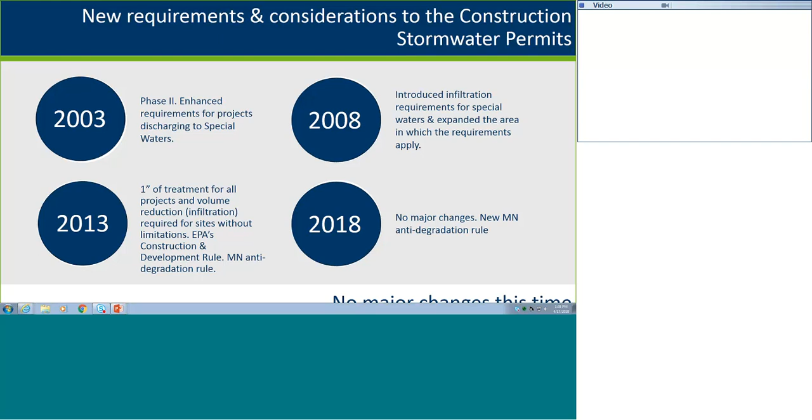In 2018, we do have a number of changes, but I don't think that any of them are major. There's nothing that's wide sweeping that's going to affect everybody or all types of projects. There are certainly changes that will affect your project on a project-to-project basis. But no major changes in 2018.

So I mentioned this document, the guide to changes for the draft permit, which is available on the website. You might want to have this out. This is the outline, as I mentioned, for the day today. I'm going to go through this whole thing. It's all the changes. I wanted to talk a little bit about this document. This document is intended to encompass all of the changes that we made. All of the changes that result in a change of policy or a change in meaning or just a changing in the expectation of what the MPCA is looking for. They should all be listed in here.

There are other things on this document that are not a change in policy, meaning, or expectation, but they are a point of interest or otherwise a part of the permit that looks so different that I thought I should include it on here. So I did mark each one of these with an asterisk as to whether I thought that it was a change in policy, meaning, or expectation, or whether or not it was not. Not every change is listed in here that was a format change, for example. I have some examples of that here coming up. But if we did make a change in the words and we are expecting something different from you, it's on this list.

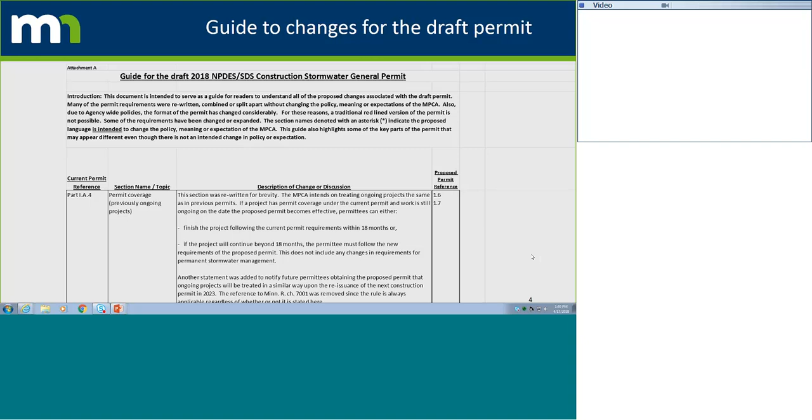I have an example here that we can go through, and I kind of just picked one here. Let's take a look at what the permit says for perimeter control. We'll look at what the permit says now and what it says in the draft permit and compare the two here. I think this is a really good example of what we did throughout this entire document. We went through this whole thing and changed and rearranged everything, as I'm sure you noticed as you went through it.

So perimeter control, which is one of our basic permit requirements, some people call it the silt fence requirement. We do require perimeter controls in certain areas, and it does not have to be a silt fence. It can be whatever you think is the most appropriate best management practice for that situation. But the permit will tell you where these things need to be. So in the current permit, Part 4C1, we talk about installing sediment control practices as necessary to minimize sediment from entering surface waters. So if you have a wetland in the middle of your project, you have to have a perimeter control around that.

That's what that's saying. In Part 4C2 of the current permit, we talk about establishing perimeter controls on all down gradient perimeters. That's the other area of your site where you are required to have some type of perimeter control. So we want to see something around the outside of the site, on the down gradient side, and around any surface waters that are on or adjacent to the project. Part 4C2 also goes on to say a clarifying statement about a floating silt curtain, and the fact that we do not recognize a floating silt curtain as being a perimeter control for the purposes of this requirement. This is the way that it's laid out in the current permit.

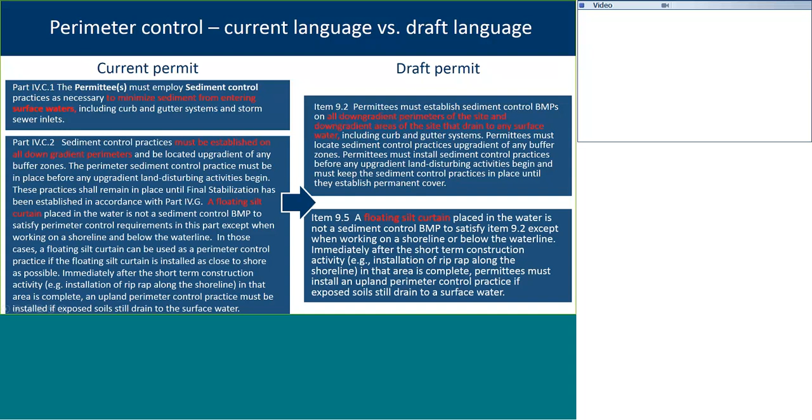So the permit has a whole new format, as I'm sure you've noticed as well. The MPCA is in the process of standardizing the format for all of our permits issued. It's all part of our new computer system here that we use for a number of things, including generation of permits. All the permits that come out of this building are going to look more or less the same, so we've all had to adjust to that.

As I mentioned, the document was also edited for grammar and for consistency with other permits. We changed the wording on a lot of these requirements from a passive tense to an active tense. Nearly every part of this permit has been rewritten in some way. It is shorter - we have about 20% fewer words total, if you do a word count on that. So we were able to get a little bit more efficient with that.

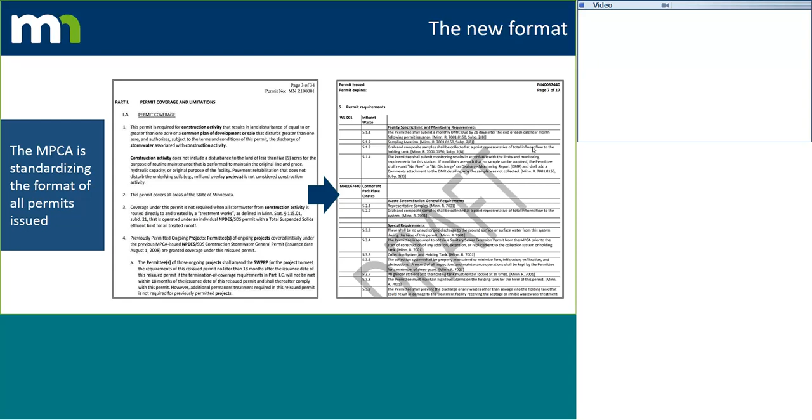Something to keep in mind - I know a lot of people have stormwater pollution prevention plan templates. I'm sure there are a lot of documents that have been generated for your city, your business, or your company where some of this formatting change may affect that. So I hope you take a minute to think about the ramifications of the new format.

One of them that I'll talk about right now is what we did for the table of contents. So let's take a look. We have our current permit on the left-hand side, and our new draft permit on the right-hand side. They look very different, but they do have a lot of similarities.

The 25 items in the new table of contents for the draft permit basically follow these part numbers in the current permit. We have the big letters A, B, C, and D all the way down, plus Appendix A and Appendix B - that's basically the makeup of the new table of contents. What we've gotten rid of are the major headings, the Roman numerals, parts 1 through 5. Those have been omitted, and there are some ramifications for omitting those.

Specifically, our state rules refer to those, and I'll discuss it a little bit more as we go through here. It is listed as one of the changes, so just hold on to that thought for a minute. Those large Roman numeral part numbers that we've talked about for years are no longer there.

The other thing we changed in the table of contents is we reduced the general provisions section into just one part, as you can see there. And the permanent stormwater management system piece, which encompassed numerous parts - all of our specific design parameters for wet sedimentation basins, infiltration basins, and filtration basins - we expanded those and gave each of them their own section. So it got a little bit shorter in one way and a little bit longer in another way, and that is the makeup of the new table of contents.

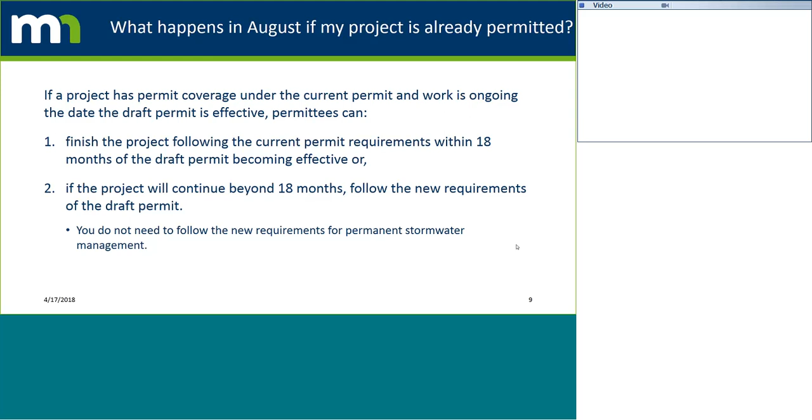Okay, let's talk about the waiting period for coverage. This is a big change.

We currently have a mandatory 7-day waiting period when you apply for the permit. We are trying to omit that. We've had a 7-day waiting period for as long as I've worked here, I guess. It seems all states have a waiting period. Some states are as much as a month. The EPA has a waiting period as well. We loved the waiting period as well in the past.

You know, we didn't used to have an online application. People applied with paper, and we had to process paper applications. We had to return applications if they were incomplete. We had to get checks cashed. There were a lot of things that had to happen here. The waiting period was very valuable. We are running at pretty much 100% of our applicants coming in online now, and a lot of those issues that we had to deal with just aren't here anymore. And we have found really no compelling reason to make people wait for 7 days, so we are trying to omit that 7-day waiting period.

So now that I've said that, you do have to understand that a few things still have to happen in order for you to have your legal NPDES coverage. You do have to successfully complete the online application. Most of the information is required, so you'll need to get through that. You'll need to get to the end, and you'll need to certify that all that information is correct, and you'll have to make the payment.

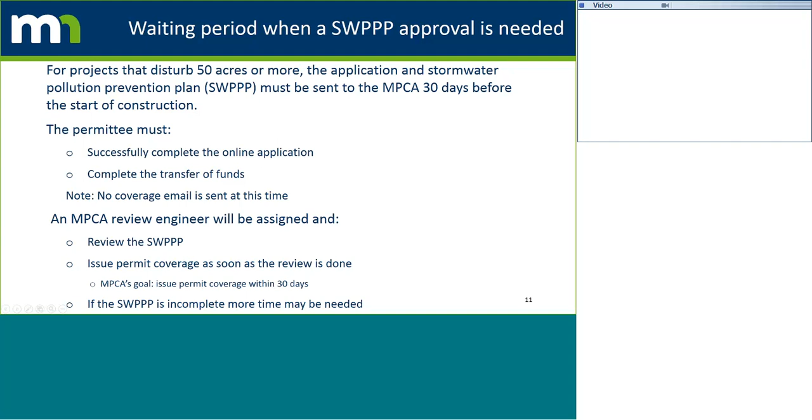All right, moving through our changes document. Let's talk about the stormwater pollution prevention plan for just a minute. This is another section that was rewritten dramatically. It's quite a list of things that we asked for in the pollution prevention plan.

A lot of the sections that contain multiple items were divided into individual items. There were some duplicate items in that list as well, so those have been removed. For the most part, the list of SWPPP elements that's required is the same. There are some additions and some modifications, and we'll go through those.

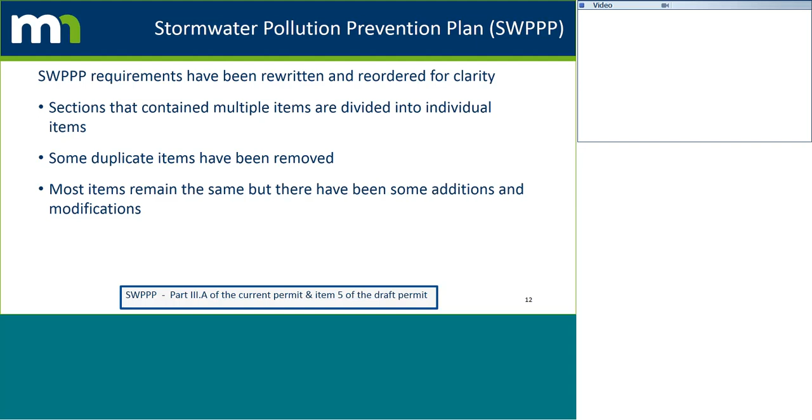This is all in item 5.1 of the draft permit. I think there's 25 items listed there. Those are all the components that need to be a part of your stormwater pollution prevention plan. So again, it's quite a list. Most of it's the same, but I will highlight those places where it is different.

One thing we're going to change is the part about the SWPPP amendments. There's a section in the current permit where we talk about SWPPP amendments and when those have to happen. And the section in the draft permit starts at 6.1 where we talk about SWPPP amendments.

The problem we're finding is our inspectors are going out to a lot of sites and they're seeing that people are not following the stormwater pollution prevention plan. The contractors are sometimes not installing the BMPs that are shown in the SWPPP, and they're using less effective BMPs, and frankly, a lot of them that are just not appropriate for the site conditions.

So, I'll make up an example here. If you're doing work on a bridge abutment with a 45-degree slope down to water, a stream, let's call it, and the SWPPP's calling for an erosion control blanket to be installed, we don't want to see just mulch in that area. We don't want the contractors to make that substitution there, because that's not an effective BMP on a 45-degree slope with a stream at the bottom.

So here's what we're going to do, here's what we're proposing. Both the current and draft permits allow for SWPPP amendments. You can change your BMPs whenever you want. We're going to keep that concept the same.

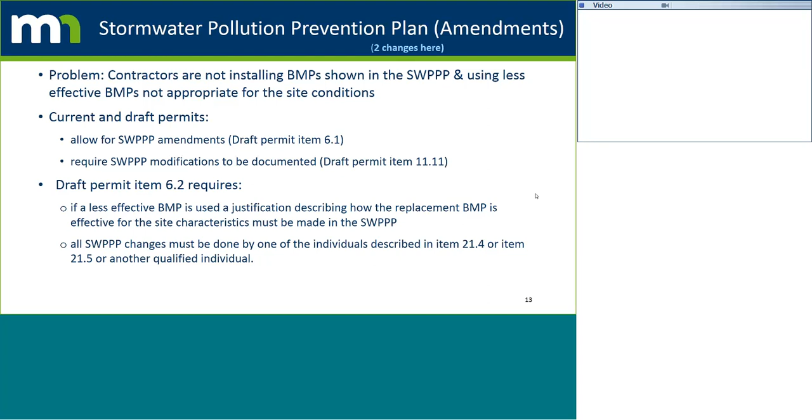So that is the draft permit and how we want to handle amendments.

Another piece of documentation. I know that the pollution prevention plan requires a lot of documentation. It wasn't our goal to load that up with a bunch of new stuff, but we're seeing some of these problems where some of these projects are falling down. We're going to ask for some documentation to try and help that. And here's one of them.

Where systems cannot meet the full volume reduction requirement on the site, for example, the site may have infiltration prohibitions, the permittee must document the reasons in the pollution prevention plan. So we have a base requirement in item 5 where we say that we want to see 1 inch of volume reduction from all the new impervious surfaces. That's our core requirement for the stormwater management piece. If you're not able to provide that, we would like to see some documentation in the pollution prevention plan.

For most sites, that's going to be that your site has one of the infiltration prohibitions on it. So if you have a site and you've only got 2 feet of clearance between the ground and the groundwater, that is one of the infiltration prohibitions. We don't want to see infiltration on that site. All you need to do is explain that to us in the pollution prevention plan.

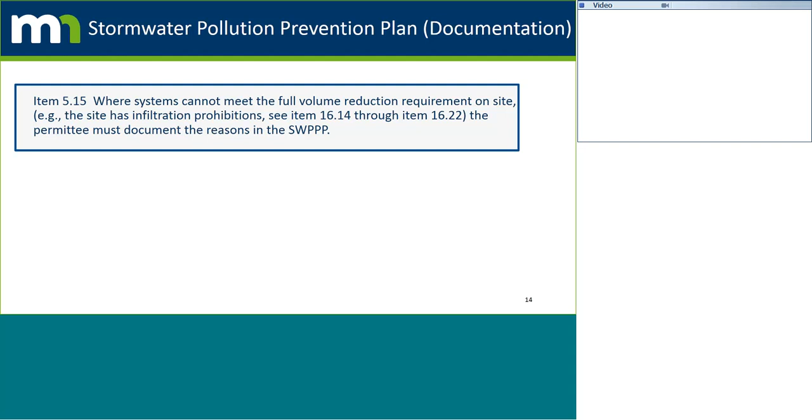We have collected quite a few of these plans where we have people doing stormwater ponds, wet sedimentation basins, which are not a volume reduction practice, and there doesn't seem to be any indication that volume reduction was even considered. So that's where this request is coming from. We want to see some documentation.

Another piece in regards to our buffer zones: permittees who determine that compliance with the following requirements is infeasible must document that determination in the pollution prevention plan.

Where we're asking for that is for temporary sediment basins. That's already a requirement in our current permit. For linear projects, if the permanent stormwater treatment system cannot be constructed within the right-of-way, a reasonable attempt must be made to obtain additional right-of-way. We want to see documentation of that. That's in the current permit and the draft permit as well.

What we've added is that if buffer zones, as described in item 9.17 and item 23.22, cannot be maintained, that you provide a justification for that as well in the pollution prevention plan.

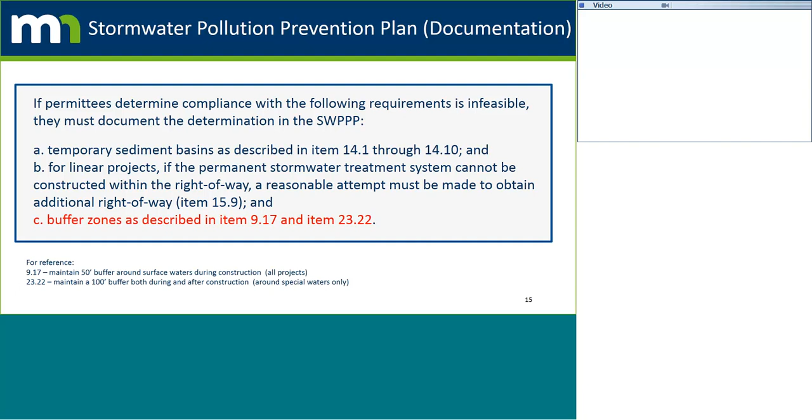Our inspectors are reporting back that a lot of the buffer zones that they're seeing out there have been cleared, and there doesn't seem to be any apparent reason why. So we don't want to see that. If you're going to be in there and you cannot maintain that 50-foot buffer zone during construction, which is required in 9.17, or if you're not able to maintain the 100-foot buffer around the special and impaired waters, which is item 23.22, we just want to see a justification of that in the pollution prevention plan.

All right, moving on to karst areas. We just deleted this part. This section, as you see on your screen here, appears in the current permit. We deleted it. The current permit already prohibits infiltration in karst areas.

We have added a requirement. The draft permit now requires a liner for wet sedimentation basins if they are in karst areas. We were not really able to come up with a whole lot of other reasons why karst would be a factor on a construction project outside of these two spots. So we deleted this general paragraph, and we now deal with it in the wet sedimentation basin piece and the infiltration piece.

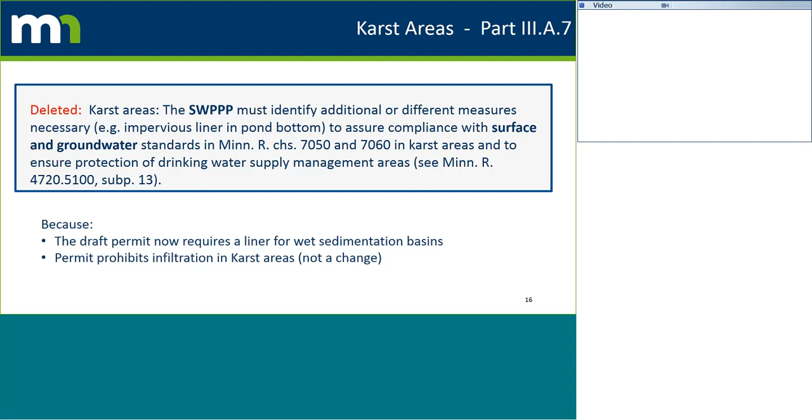And that's as much as I'm going to say about karst.

The permanent stormwater treatment part of this permit has changed too. One of the big things we are adjusting here is how this permit interacts with the MS4 ordinances. The current permit provisions allow developers and consultants to follow the local stormwater treatment requirements instead of following the construction stormwater permit requirements in Part 3D, which is in the second paragraph. This is described in Part 3D, second paragraph of the current permit.

So we added this paragraph last time. It was in response to people saying that there are too many stormwater regulations in the state of Minnesota. We have city ordinances, we have watershed district requirements, and we have this state permit. They all require permanent stormwater management if you're going to do new construction. And the idea was that these things often read the same, so why do we have to have three overlapping jurisdictions, if you will, with these requirements?

So we added a piece to our permit that said if you are in a regulated MS4 community, and that MS4 community has updated their ordinance, as they were supposed to be doing according to their MS4 permit, developers and engineers could just follow the local ordinance and they didn't have to follow the state requirements here in this part of the permit. So that was the idea.

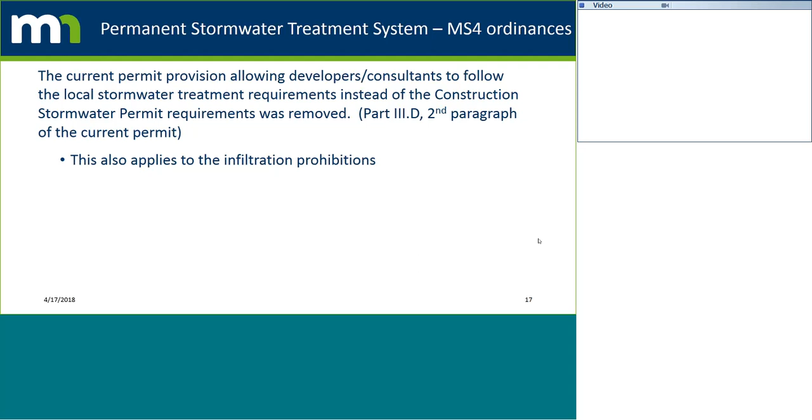Moving on. We're still in the section for permanent stormwater treatment systems. I guess I wanted to talk just a minute about the section in general. This is Part 3D of the current permit, and it's item 15 in the draft permit. We kind of go over the main goals of the permanent stormwater treatment system in this item 15.

And we reworked this piece quite a bit. It's very different looking. We tried to make it more clear. And I invite everyone to really read this item 15, go through it. I think there are 9 parts to it. And it should be clear what the goals are.

This is not where you'll find the design requirements for our systems. These are the overall goals. So we tried to very clearly define when the permit requires a stormwater treatment system, which is if your project's going to increase impervious surfaces by 1 acre or more, you're required to have a permanent stormwater treatment system.

So this section 15 goes on to explain the level of treatment, which basically is we want to see 1 inch volume reduction from those acreage of impervious surfaces. And then we try to step through what that means. How are you going to achieve this? What methods must be considered first? We want to see volume reduction considered first. And if those methods are not viable, what to consider next.

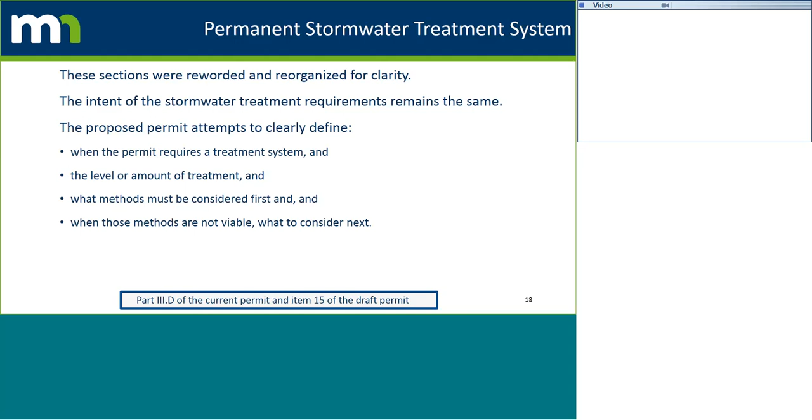So please read that item 15. It's supposed to be a clear step-through process to clearly define what it is that we expect for the permanent stormwater treatment system. And this is prior to getting into the design requirements, which we'll talk about here. So that's part 15, item 15 in the draft permit.

Infiltration prohibitions. The proposed permit prohibits infiltration systems constructed as part of the project, regardless of whether or not the construction stormwater permit requires stormwater management, if the site receives runoff from vehicle fueling and maintenance areas.

So maybe I can back up just a minute there. We have a number of prohibitions in the permit where we don't want to see stormwater infiltration. The way it's set up right now is that none of those apply to your site unless you're required to do infiltration or stormwater management.

So this is new, this idea that you're looking at right here. This is saying that for any site that's a vehicle fueling and maintenance area, we don't want to see infiltration there, and that's regardless of how much impervious surface you've added or subtracted. We don't want you to construct a new infiltration system as part of that project for vehicle fueling and maintenance areas.

This will be the only prohibition that would apply to all of those sites. The rest of the stormwater or infiltration prohibitions would only apply if your project is required to build an infiltration system.

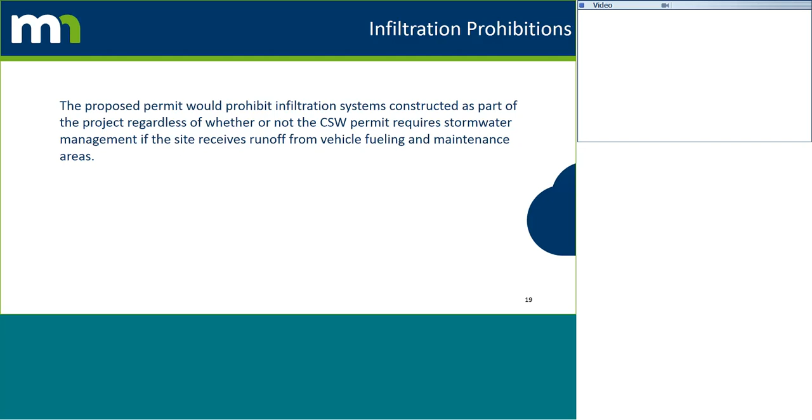All right, let's talk about soil information for infiltration design.

Out of our current permit that we have today, we state the permittees must employ appropriate on-site testing consistent with the Minnesota Stormwater Manual to verify soil types. That's really all it said, and it referred you to the manual. The manual has tons of information on soil exploration, including how to do it, where to do it, how many times to do it.

We're expecting people to follow the stormwater manual. That was the intent. The permit requirements were pretty general, if you will. And I've got to say, we've been a little bit disappointed about the quality of information that engineers are bringing to these stormwater pollution prevention plans.

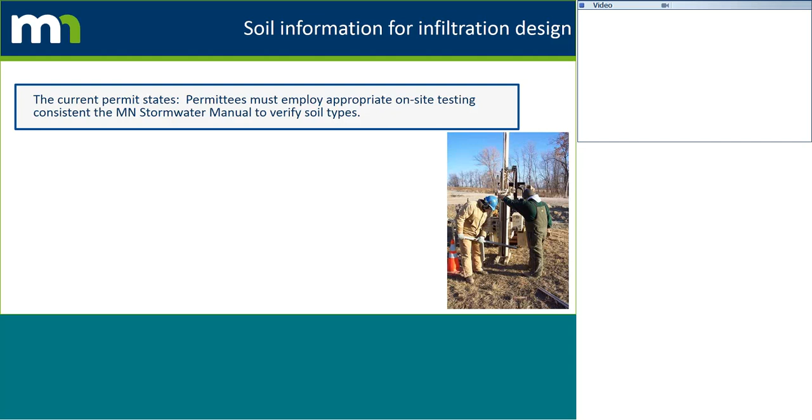Yeah, we have had people trying to use county soil information, county soil maps. We've had people try to rely on soil borings that were done nearby. A lot of times there was a highway nearby and they collected the old soil borings for those areas and attempted to do design work on those.

There were times when we really couldn't find any soil information at all. In their pollution prevention plan, we'd see a nice looking rain garden, with a depth to it and everything, but no soil information.

So we have modified this piece of the permit quite a bit here. Item 16.10 in the draft permit says permittees must provide at least one soil boring, test pit, or infiltrometer test in the location of the infiltration practice for determining infiltration rates.

So at least one. Go out there and do some on-site testing to see exactly what's there. It doesn't have to be an infiltrometer test, although that's probably the best thing to do, but at least a soil boring, or dig down and look in there. Do something in that area to find what is exactly in that area.

And the permit now requires at least one. If you have a large infiltration area, the manual is going to recommend you do much more than one soil boring, test pit, or infiltrometer test, which of course you should do, but the permit is going to require at least one.

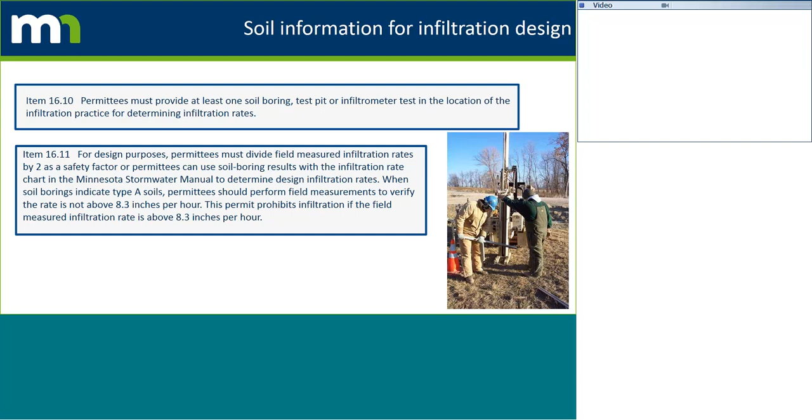Just keep in mind that there is a requirement outside of this that says infiltration is prohibited if the field measured rates are above 8.3 inches per hour. So this is a bit of a change here. We're not just going to rely on the manual. We have brought some of that stuff forward as permit requirements.

Here's another big change: infiltration prohibitions when you are around or on top of contaminated soils or groundwater. The current permit prohibits infiltration if high levels of soil or groundwater contaminants will be mobilized by the infiltrating stormwater. That's what it says today. We had numerous questions over the past 4 years about what this means and what am I supposed to do. What are high levels? What is the definition of high levels?

So if you go to our stormwater manual, we do talk about high levels. We do talk about specific pollutant parameters, and they're listed in there with numbers associated with them. If you were to look at those lists of pollutants and numbers that constitute high levels, it would lead one to think that you are supposed to be doing testing.

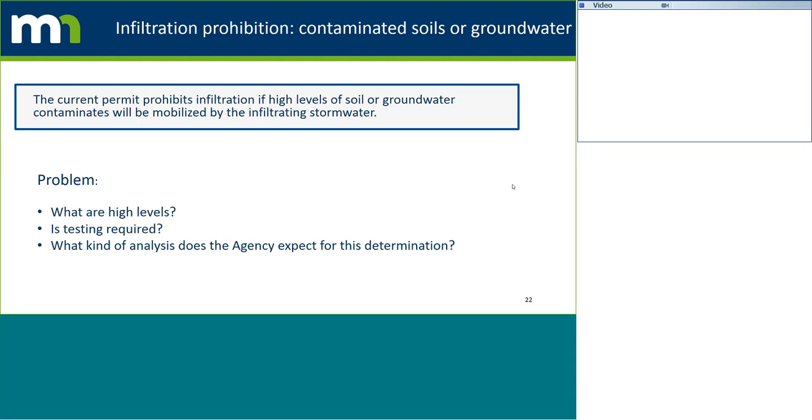So is testing required was a common question. How else are you going to know if you are in violation of this permit requirement? And I think ultimately what people really want to know is what kind of analysis does the agency expect for this determination? These are all good questions.

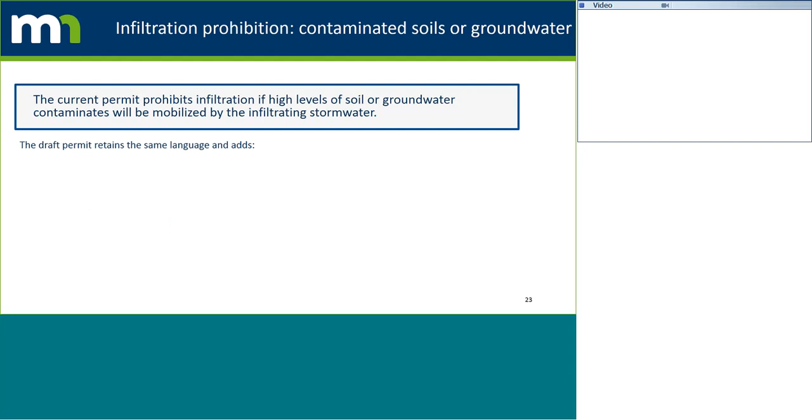So, the draft permit retains the same language here that we have in this box that you'll find in the current permit, and we have added to that. We have added this statement: Permittees must either complete the MPCA site screening assessment checklist or conduct their own assessment to determine the suitability for infiltration. The assessment must be retained with the Stormwater Pollution Prevention Plan. For more information and to access the screening assessment tool, see the Minnesota Stormwater Manual.

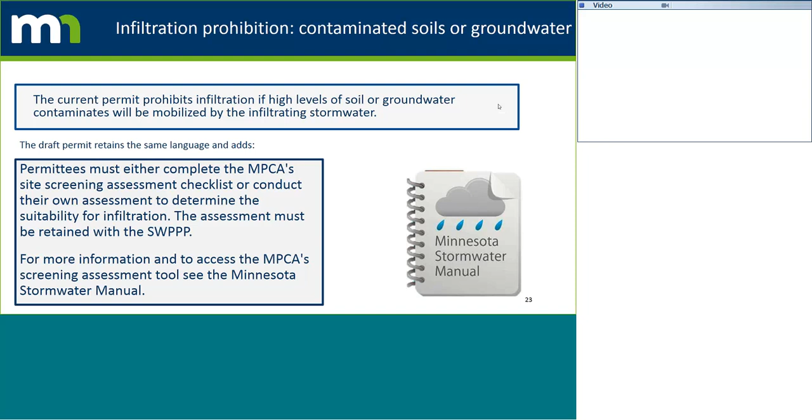Thanks for those questions, and keep those coming in. Back to these contaminated soils or groundwater issues. In addition to that checklist that we are requiring, we are encouraging people to use the What's in My Neighborhood tool that we have on the MPCA website. We have information, very specific information in some cases, on a lot of properties around the state, especially around the metro. You may find the answer to a lot of your questions right here using this tool, the What's in My Neighborhood website. Check that out.

The range of information is a wide range of information here. We have very detailed information on pollutants around the metro. We know which way they're heading in some cases. There's a lot of information here that can assist you in determining whether or not infiltration is appropriate for your site.

And what I'll close with here on this topic: if you've gone through the checklist and the site appears to not be sending up any red flags off of the checklist, you're welcome to proceed with infiltration. If there are things on the checklist that are raising red flags, or if your property shows up on this What's in My Neighborhood website, we are not asking you to do any further exploration beyond that. You still don't have to go out and do testing. We're telling you that infiltration is not appropriate for your site and that you should try a different method. So that really can be the end of your exploration on this issue.

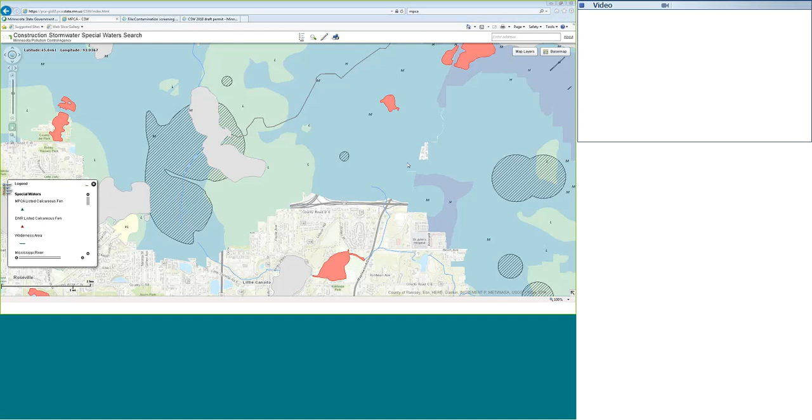Bear with me 1 second here.

All right, a quick one on filtration systems.

Do you want me to pause for a minute?

Okay. A quick one on filtration systems here. We do have one question on this last topic. What about drinking water supply management areas where there's no MS4 permit scheme?

Oh, there's a good question.

Yeah, we have drinking water supply management areas that are not within the boundaries of a regulated MS4 community. Our permit is going to prohibit infiltration in those areas. And the primary reason is we have a relationship, if you will, with our MS4 community.

They hold a permit with us. We know who they are. We're comfortable with letting them make this determination. Hopefully they'll consult with us on that.

And we're just not comfortable with these drinking water supply management areas that are all over the state. And we just don't know who these people are or their level of expertise on this subject. Thank you.

We also have another question. Please discuss seasonally saturated soil versus groundwater. My understanding is if mottled soil, like for septic system design, is found within 3 feet of the surface, this is considered an infeasible area for infiltration.

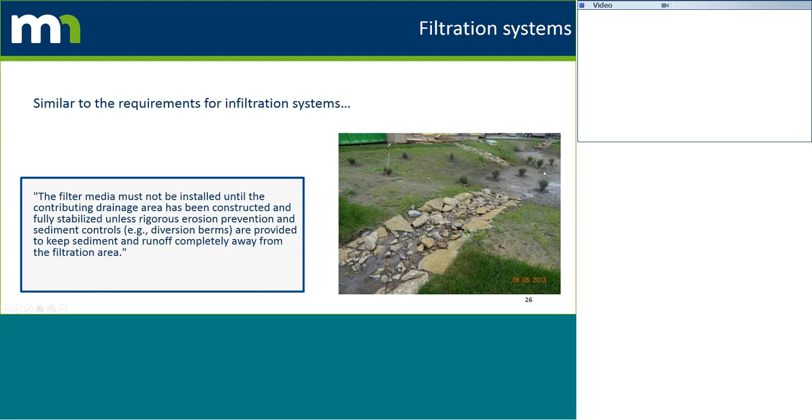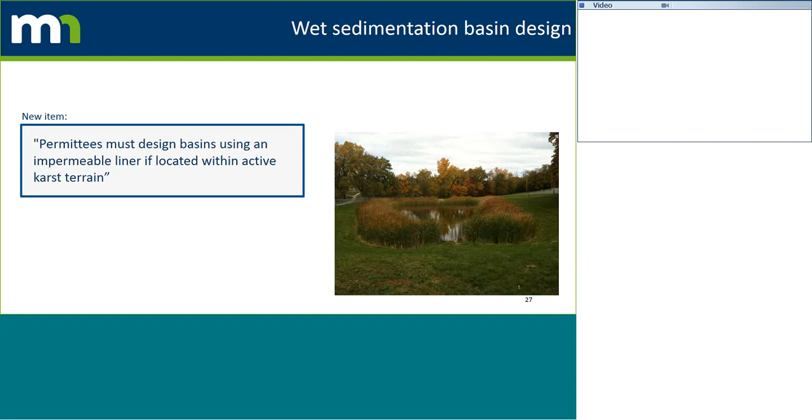Wet sedimentation basins - I think this is item 18 in our permit. We have our long list of design parameters, and we made one adjustment: permittees must now design these basins using an impermeable liner if located within active karst terrain. I mentioned this earlier - the stormwater manual has always recommended a liner in those areas, and we've always told people to install liners there. It's never really been in the permit, and now it is.

Conveyance channels. How are we doing for time? Fifty-five minutes, okay great. Conveyance channels.

Part 4B3 of the current permit contains this requirement. I'm not going to read the whole thing, but it talks about conveyance channels and routing stormwater around sites. This piece was added because of the EPA C&D rule - I believe we took it word for word. We already have a lot of requirements in the permit for ditches and what we expect people to do around them, so this conveyance channel piece was in addition, added because of the C&D rule.

Quite honestly, I'm not exactly sure how this requirement came into play on a lot of construction sites. I get what they're saying, but I don't know that it's always possible to route stormwater around the site. It didn't seem appropriate on all sites, and we already had a number of requirements in the permit for what to do with swales. So I got the idea to summarize all of those ideas, and you can find that in the Guide to Changes document.

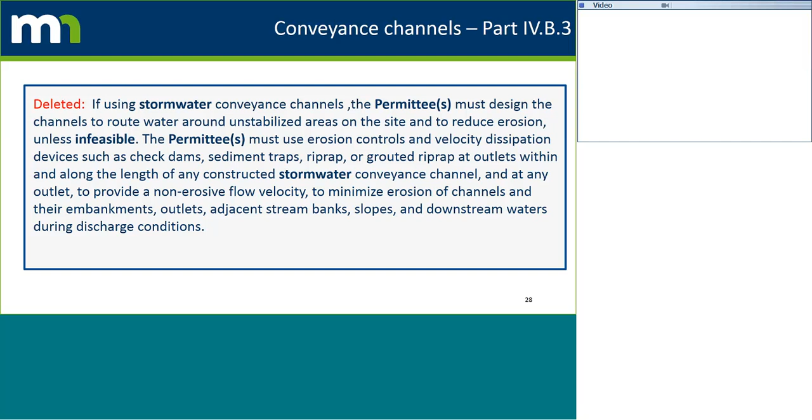This paragraph has been deleted. We feel that we've got these channels protected and covered through our other permit requirements.

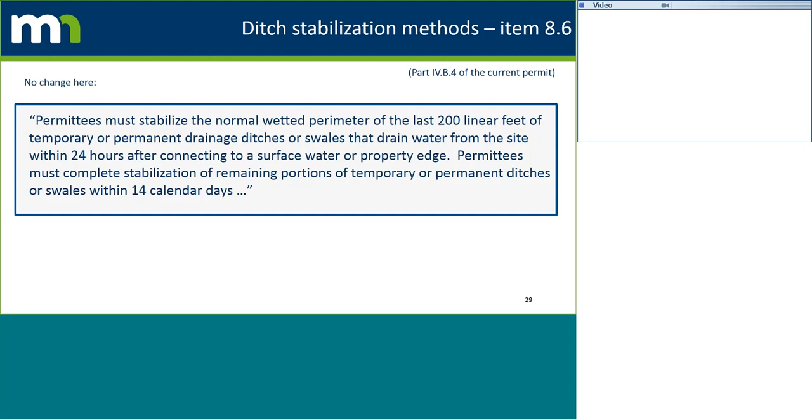Let's talk about ditch stabilization. We've changed this piece a little bit as well. Maybe I'll set this up with this permit requirement, which leads into the next piece - this has not changed, you can find it in the current and draft permit. Permittees must stabilize the normal wetted perimeter of the last 200 lineal feet of any temporary or permanent drainage ditch or swale that drains water from the site within 24 hours after connecting to a surface water or property edge. Permittees must complete the stabilization of the remaining portion of these ditches within 14 calendar days. So we kept that piece.

The current permit makes a clarification, stating that permittees must not use mulch, hydromulch, tackifier, or similar erosion prevention practices within any portion of the normal wetted perimeter of a temporary or permanent drainage ditch or swale. That's what we've been running with for quite a few permit cycles now. And we've added this piece regarding a continuous slope of greater than 2%.

So while we were very prescriptive as to not use mulch anywhere in a ditch, we are changing our position on this. If you want to try mulch or hydromulch on some of these flatter ditches, the permit's going to say that that's okay. We heard from a lot of people on this permit requirement, a lot of people at Department of Transportation, and a lot of people that do county road projects and that type of construction. We do have a lot of flat parts in the state of Minnesota. We have ditches that are at 1%, we have ditches that are at 0%. If you have a project like that and you want to try mulching those areas, the permit's going to now say that that's all right.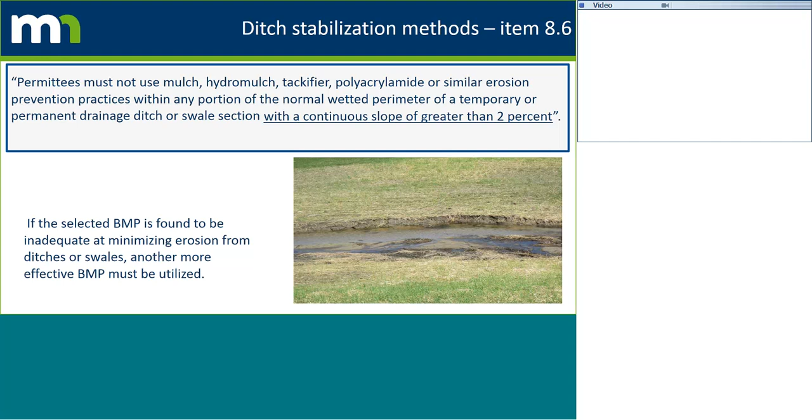Anything with a continuous slope of greater than 2%, we are going to be looking for the more robust erosion control practices like blanket, and not mulch. As with all the BMPs in our permit, if the selected BMP is found to be inadequate at minimizing erosion from ditches or swales, another more effective BMP must be utilized. So you may still end up having to blanket some of these ditches, but the permit is allowing you a different starting spot. If you want to use mulch and try it and see if you can get vegetation going, the permit will say that's okay. If it's getting blown out and washed away every time it rains, just like every other BMP in the permit, we would ask you to do something that is a step above, a level higher.

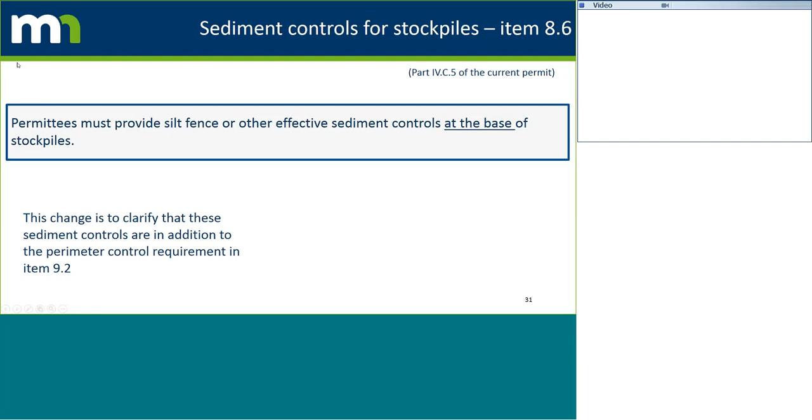A word about stockpiles. This isn't necessarily new, in my opinion, it's more of a clarification. But I think that there's been some misunderstanding about this requirement. We say that permittees must provide silt fence or other effective sediment controls at the base of stockpiles. I'm sorry, that's the piece we added - we added the words 'at the base.' We've always required sediment controls around stockpiles; we're now going to say that it has to be at the base. And just to clarify, this is to help clarify that this whole requirement is separate from the perimeter control requirements that we discussed earlier in 9.2. So hopefully that makes it more clear.

There seems to be a little bit of a misunderstanding amongst permittees. A lot of people felt that if they had perimeter control around the entire site, that they were automatically in compliance with the stockpile requirements, no matter where the stockpile was inside of the site. That is not true. This is a separate piece, so we're trying to clarify that here.

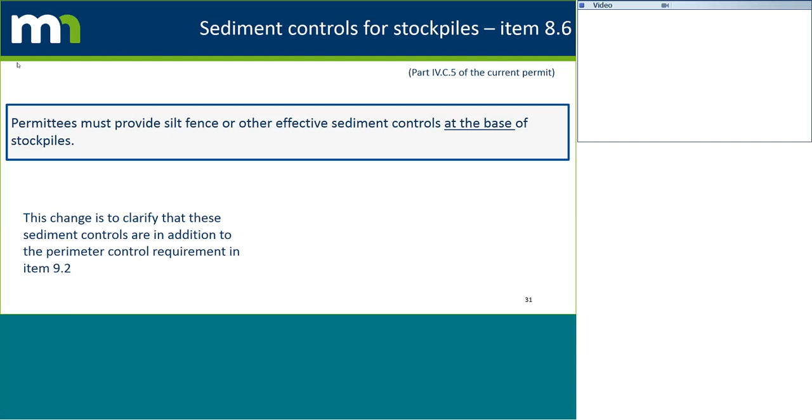We do have a question coming in on your last slide regarding stockpiles and perimeter control. Regarding stockpile perimeter control, what acceptable distance from the base of the pile does the sediment control have to be located in? Oh, that's a good question. The separation distance is not currently defined in the draft permit. 5 feet would be a nice recommendation, but we did not put that in the draft permit. Perhaps that's a good suggestion - please put that into a comment. Right, it has to be effective, that's the requirement. You can increase the effectiveness by adding some space in there.

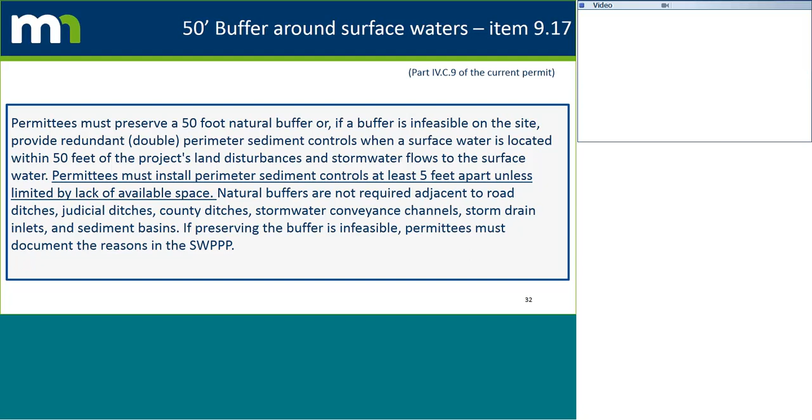We have recommendations on a lot of this stuff in the manual. Again, not all of this stuff becomes permit requirements. But yes, the draft permit does not specify.

And then one more question on the buffer you just talked about. Can you be in the buffer area if redundant sediment controls are in place? I guess the answer to that is yes.

You're supposed to be avoiding those areas. The 50-foot buffer is a sediment control requirement. Of course, the permit recognizes that you're going to have to be in there for certain reasons, and if you are in there, that's when the redundant controls are needed. And of course, you must document that as the new piece that we added.

I'll talk a little bit more about buffer zones. We have the 100-foot buffer zone that appears in our permit for special waters. I want to spend a little more time on buffers, so we'll come back to that towards the end of this.

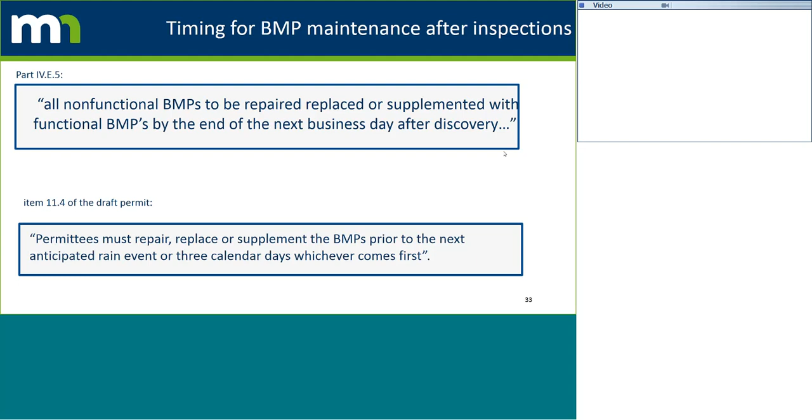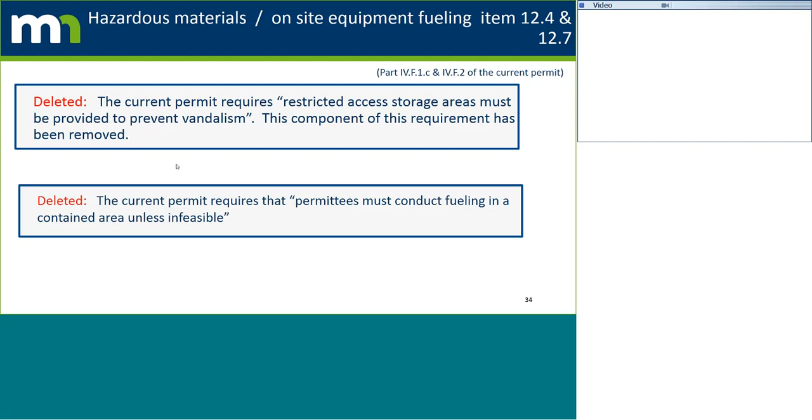We deleted these. Some of the stuff in the pollution prevention section, I start to wonder whether or not it's really a stormwater requirement. Vandalism is one thing - if you've got vandalism on your site, you probably have problems you're going to need to react to. Same with vehicle fueling areas. If you spilled on your site, you're still responsible for that. You're still responsible for vandalism, and for things that have been spilled, regardless of any permit period. They just didn't seem appropriate, so we removed those. That's as much as I'll say on that.

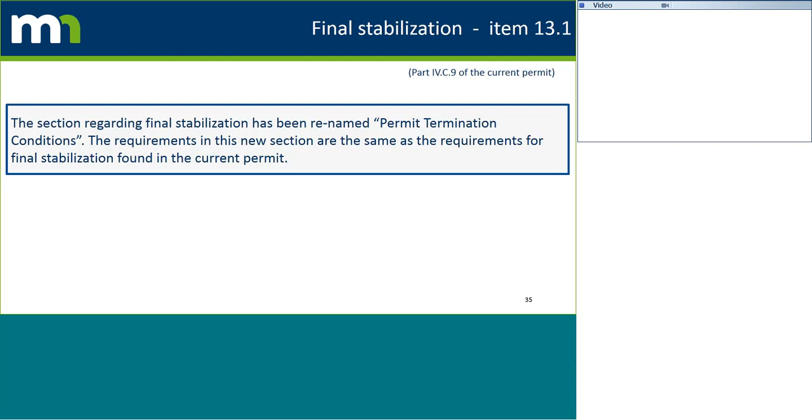Final stabilization was the title of one of our permit sections in the current permit, Part 4C9, to be specific. It is item 13.1 in the draft permit. We just renamed this piece - instead of calling it final stabilization, we're now calling it permit termination conditions. That's really what it is. If you read it, there are 5 things on that list, and they are the things you need to do before you can terminate the permit. One of those things was that you have permanent cover on your entire site. All too often I have heard people use the term final stabilization when they really meant permanent cover, and it seems to be causing some confusion. It seemed like an easy way to solve this by just retitling the section Permit Termination Conditions. So take a look at that. The actual list below is the same - we made no changes there. It's just a change in title.

So let's talk about discharges to prohibited waters. One of the things we have to deal with in this new permit are the new Minnesota rules addressing anti-degradation. This is one thing that has changed since the last permit, and one thing we were required to write something different about. We have this classification now called prohibited waters, and it's a higher tier that requires more protection. This is all part of the anti-deg rule that passed in Minnesota a couple years ago. Federal rules require all NPDES permits to meet these state rules for anti-degradation as well. We had to put something in for projects that discharge to prohibited waters. So we have that now.

The prohibited waters is a smaller subset of our special waters that we've always had. In fact, the actual bodies of water we're talking about here haven't changed. What is proposed as a prohibited water is still protected as a special water under the current permit - it's just now in a different classification. So if you look at our whole list of special waters in the back, which is long, with all the different types - wilderness areas, the Mississippi River - they're all listed back there. That list is the same; we haven't changed the actual waters at all. But we are changing the requirements for a subset of those waters, which is called the prohibited waters.

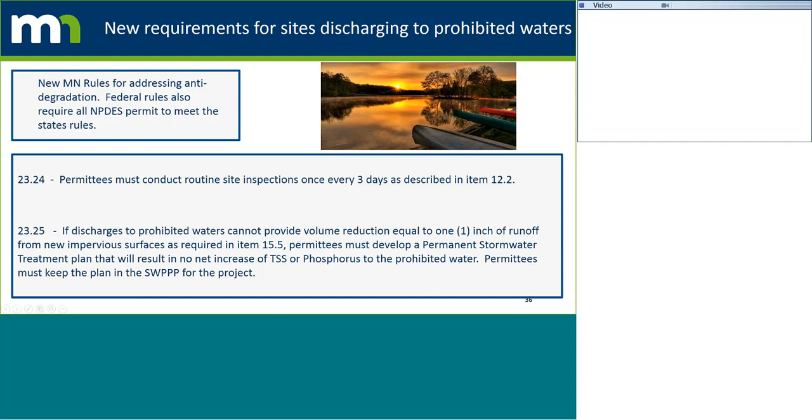Using vegetation, grass swales, ponding, combinations of these things - perhaps iron-enhanced sand filters would be an option for some of these areas. Potentially tricky, but not potentially a lot of projects here. And as with all projects, if you want assistance with this stuff, please call us, and we will help you get through this.

Temperature controls for trout streams. This piece has changed a bit. Let's read the base requirement here. This part has not changed.

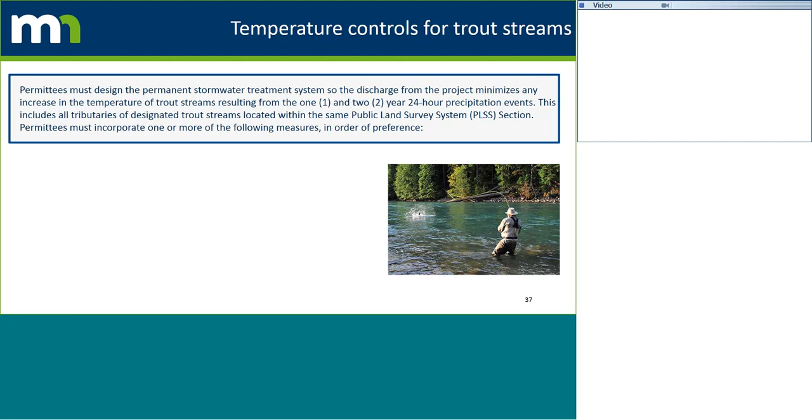We are saying, and will continue to say, the permittees must design a permanent stormwater treatment system so that the discharge from the project minimizes the increase in the temperature of trout streams resulting from the 1 and 2 year 24-hour storm event. This includes tributaries. And we say that permittees must incorporate one or more of the following measures in order of preference.

So the current permit has a list, A, B, C, D, E, of these things that we want you to try. We have modified that list. The draft permit has reorganized these a bit. In the current permit, number 1 was to minimize the new impervious surfaces.

Well, that might be one of the best things you can do for temperature. That's something you should be looking at during the planning phase of your project. But if you are still creating new impervious surfaces, you need a BMP to mitigate for that, and simply minimizing it doesn't mitigate the impervious surfaces that you have created. It didn't make a whole lot of sense. We took that out of this list.

And the other ones are listed there. We're talking about connected impervious surfaces. Letter C talks about doing stormwater infiltration. D talks about ponding, and E ends with other methods. So the new list is different from that.

We are now saying that if you can provide infiltration as described in item 15, that is all we're going to ask for temperature mitigation if you are discharging to a trout stream. This is similar to what I just described - if you can provide 1 inch of volume reduction per the base requirement you'll find back in item 15, that really is the best thing you can do for temperature control in trout streams. So we moved that to number 1.

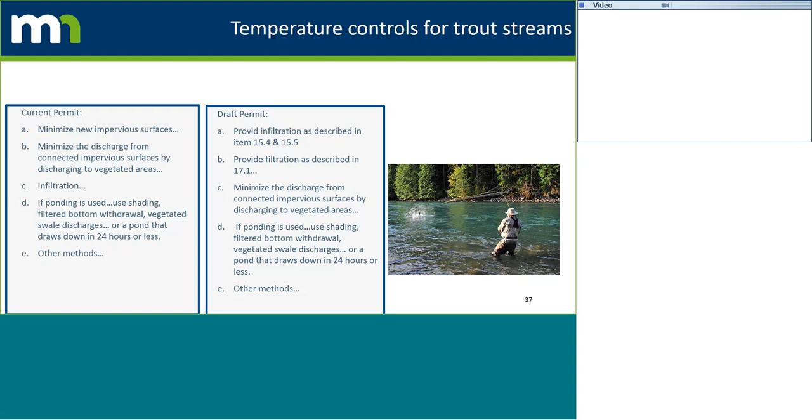I want to come back to ponding around trout streams too. We had questions on that earlier, but this is the temperature control for trout streams as you see it in the draft permit. We have just reorganized that list, if you will, that we have in the current permit.

All right, let's talk about who should be listed as a permittee. As you know, this program is a co-permittee program. We have an owner and an operator that sign on to this. They are the people who are legally responsible for everything that's in the permit. We intend to more clearly define who the owner and operator is.

We have added a new definition for general contractor. Let's take a look at that. General contractor means the party who signs the construction contract with the owner to construct the entire project described in the final plans and specifications. Where the construction project involves more than one contractor, the general contractor is the party responsible for managing the entire project on behalf of the owner.

That's a new definition that we added. It is word for word the definition of general contractor that we had in our permit, I think three permit cycles ago. And we have not had a definition for general contractor since then. So we're bringing that back. It ties into the definition we have for operator, and we added that underlined part there.

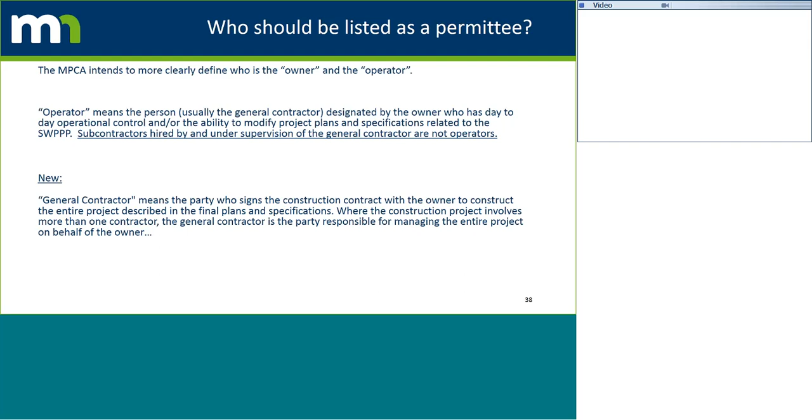I do want the permit language to be clear, though, so we will take a look at how that is presented in there.

The last item on our list, if you're looking at the guide to permit changes, is what I call rule references to this permit. This item was added to the proposed permit to preserve continuity with state rules, such as Minn. R. 7090, or other documents which refer to specific parts of the construction permit by name that will no longer be used.

Going back to the beginning of the presentation, I told you that in the table of contents, we're taking out Roman numerals 1, 2, 3, 4, and 5. Some of those Roman numerals are these parts right here. Roman numeral 3 is titled Stormwater Discharge Design Requirements. Reference to that part of the permit is in our Rule 7090 and some other rules, and that's gone now. We don't have that section titled anymore. Part 4 of the current permit is titled Construction Activity Requirements, which is slated to be deleted. We're not going to have a section titled that anymore. The pieces within that are still there, but that title is gone. Appendix A is also gone - that's all covered in item 23.

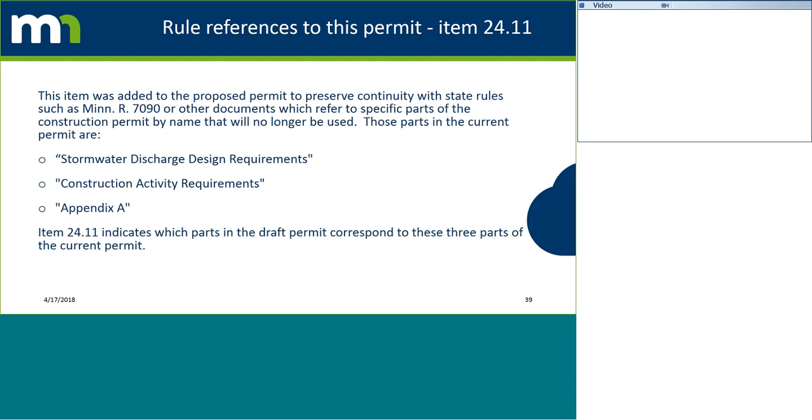Going back to what I said when we modified that table of contents, there were ramifications for removing some of those items, and I want you to think about those, and then look at this piece, item 24.11, and see if that fixes the problem for you. If not, please comment, and maybe we can do something else to preserve that continuity. But we did cause a little trouble by taking those titles out of the table of contents.

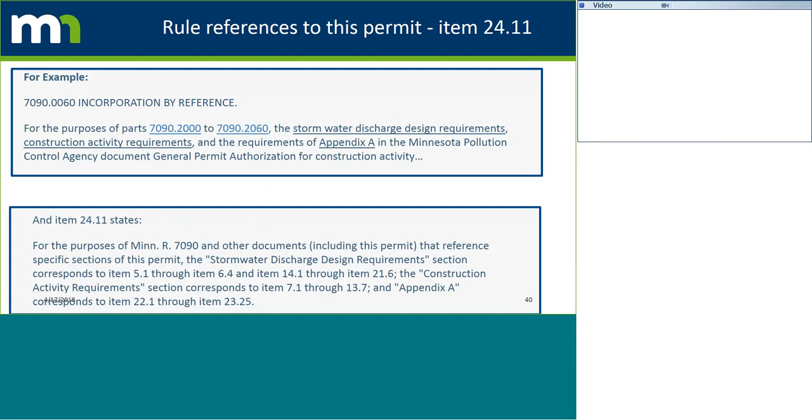So here's my example. We have Rule 7090, and this is what it says word for word right out of the register: 'For the purposes of these parts, the stormwater discharge design requirements, construction activity requirements, and Appendix A.' Well, those things aren't going to mean anything in the draft permit, because those words are gone. Oh, here's the piece I was looking for - this is the actual item 24.11. So think about your own fact sheets, your own ordinances, or any other times that you've referenced our construction permit, and see if this piece is helpful for you.

That brings us to the end of the changes to the permit document. I'll keep rolling here because we've had questions come in, and we had questions come in ahead of time too. I did say that I would talk about buffer zones a little bit more - I want to get back to that as well.

First of all, let's just talk about buffer zones and how the permit talks about buffer zones. There are two very distinct pieces to our permit that refer to buffer zones.

We have in the sediment control practice section a 50-foot buffer zone requirement, which was part of the EPA's C&D rule. You're required to maintain a 50-foot buffer zone or provide redundant sediment controls during construction. That is solely intended as a sediment control practice. That's why we put it in that section. That was the EPA's intent. It is a during construction requirement, and that is what it's for.

That was added on the previous permit cycle due to the C&D rule. Prior to that, we have always had a 100-foot buffer requirement around special waters only, which appears in Appendix A of the current permit. And that is a different buffer requirement, and I want to make that clear. That 100-foot buffer isn't in there for sediment control during construction, but it is intended to be a permanent buffer that is maintained both during construction and after construction. It only applies to special waters. We didn't change that piece. But it is different. It's there for a different reason. It's in a different part of the permit.